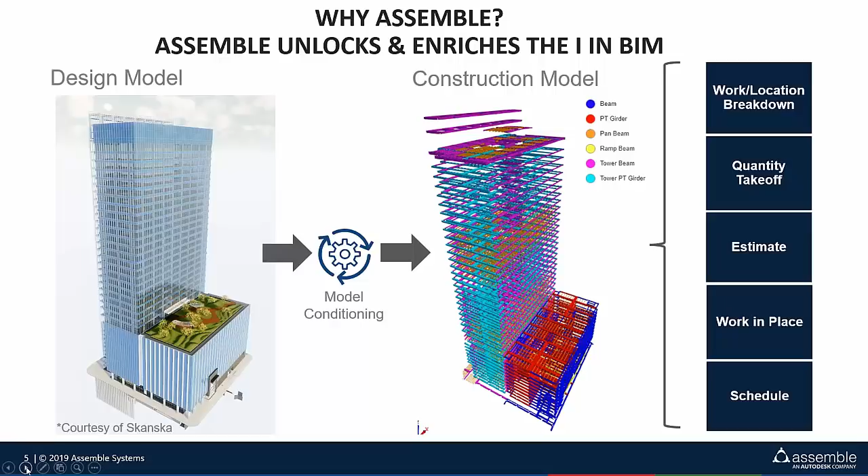So that's the summary. Why don't you go ahead and jump in and give a little overview of BIM 360? A big piece we want to start with is giving everyone an understanding of Autodesk's approach to the construction space, but more importantly, the project environment and how we're driving collaboration and communication across all of our different disciplines.

The backbone of our focus and our game plan is to introduce more predictable outcomes into the job site. And the best way that we can do that is by first digitizing all aspects of it. And that's not just as simple as adding features and functionalities.

We want those integrations between different products, but as communication occurs between different solutions, and also, most importantly, different people in the field, in the office, even working and collaborating with owners and designers as decisions are being made, we want all of that information to drive predictable insights into the projects.

Now, the challenge that we've always had is how do we pull all of this great data into one unified platform? And that's really been our focus. How do we pull these platforms together? And we've really taken an approach that's threefold.

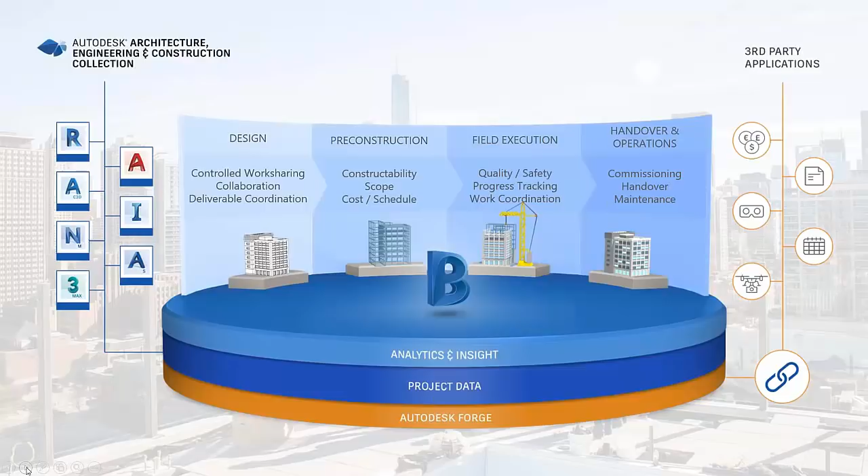And as we look at this next slide, what you're going to see is that we've layered everything on top of an open API platform called Forge. And Forge really serves as the backbone for all things BIM 360, and more importantly, the data structure here at Autodesk.

Now, when we look at how Forge operates and how it's structured, it provides access to third-party applications so that they can integrate directly into some of the solutions that you know and probably use on a regular basis, like Revit, Navisworks, and even AutoCAD and Civil 3D.

All of that information also compounds and collaborates with our BIM 360 modules, which we'll talk about in just a second. As all of these interactions are occurring between third-party applications, our own homegrown tools, and also the core products that make up a lot of our portfolio, we're gaining analytics and insights into how the teams are working on different projects.

We're also gaining insights into how information is being shared, what opportunities we have for improvement, and all of that's layered into each one of the different phases, whether it's design, pre-con, field execution, and obviously into owner operations.

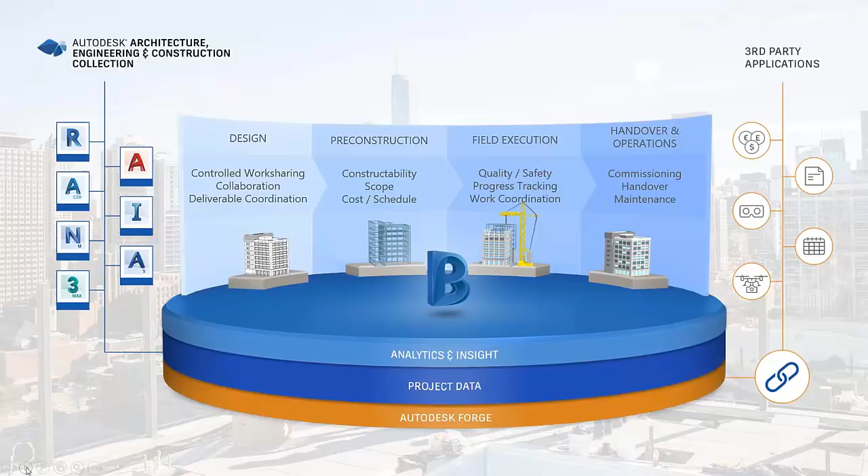Now, the backbone of this is our document management platform. And when we look at our document management tool, what we're looking at is a series of different applications and functionalities. This workflow comprises a lot of different features and functionalities.

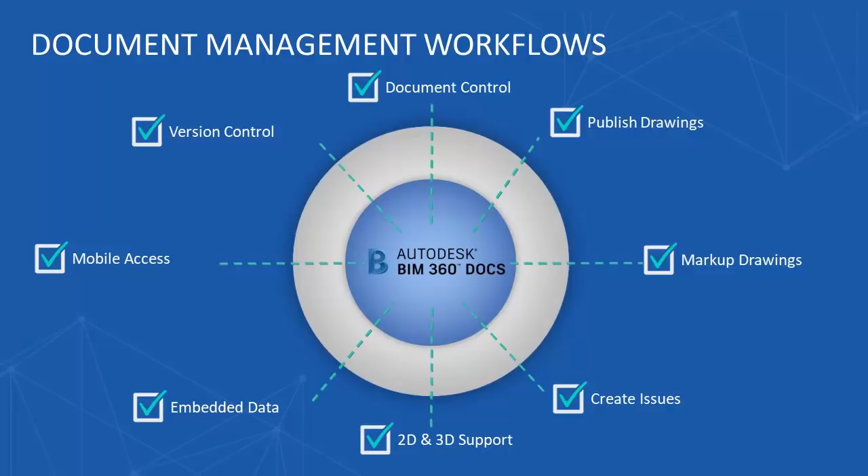For us, that includes everything from document control, publishing documentation, doing revisions and markups, and also looking at documents in both 2D and 3D views. This allows us to really deliver a complete connected solution to manage all of our 2D plans and 3D models in one cohesive location, one simplified location.

The next little piece that we're going to talk about is our design collaboration. So it is important, obviously, that we have a singular document management platform, but we also want to make sure it's easy for customers to get information from products like Revit and AutoCAD into a document viewer, a really simplified way of viewing this. So our design collaboration workflows take that just a step further.

Using our design collaboration tools, we can actually live link and real-time share documents directly from products like Revit to ensure that information is shared at the times that it's most important. To take that even a step further, we allow you to actually generate design packages.

This allows you to create documents and store them in a way that was purpose-built for the architects and engineers, while also giving general contractors access to progressions as those sets evolve, so that we're not just doing sheet comparison, we're doing set comparison and understanding where critical impacts on a project may affect long-term development.

This also allows us to do simplified change visualization and ensure that we understand the impact of design changes as they occur throughout a project.

We take that a hair further by actually evolving our workflows-based approach around coordination. On the next piece, you'll see that we have the ability to take the model that's been uploaded and, using our Glue platform, instantly run clash reports, do model navigation, and work with our trades.

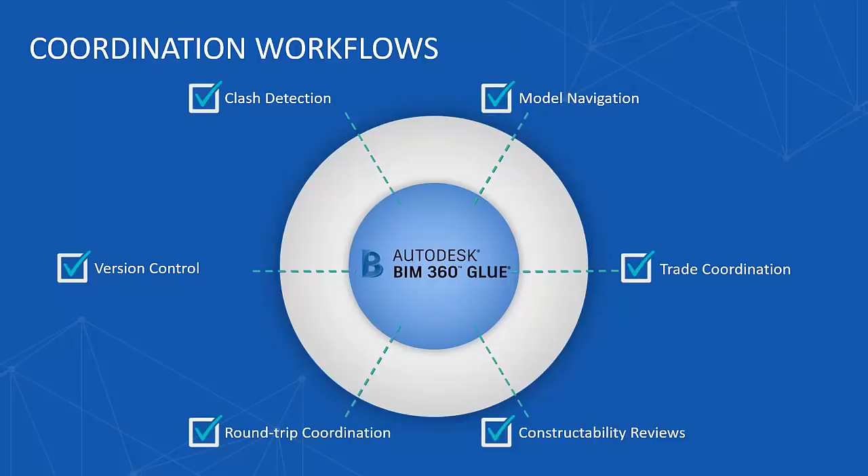Now, once all of this design communication, collaboration, and data has been evolved, we move into our project management workflows. This is really the opportunity to take all the great documentation and models that have been generated and make them actionable.

Inside this module, we have the ability to work through submittal workflows and develop RFI reports. We also can go through safety modules, quality control, and just recently released our new cost control modules, really allowing users to take advantage of every piece of data they've built throughout the process and deliver a cohesive model set.

Now I'm really excited to hand this off so you guys can see how Assemble plays a role in building out the totality of what Forge and BIM 360 are bringing to the construction space.

Great overview. So, as I said before, and given the context here, that title says Assemble and BIM 360 are better together. There were so many things as we were working independently that I could see our roadmap, including capability that Brandon just went through, all throughout BIM 360, and vice versa.

And I know in conversations that we were having that BIM 360 was looking at that object-centric approach, and how you can use the model to organize content that you're sharing across estimators, superintendents, schedulers, project managers, and have that as your common data environment, the host of information and how you organize, collaborate, and dive into that information.

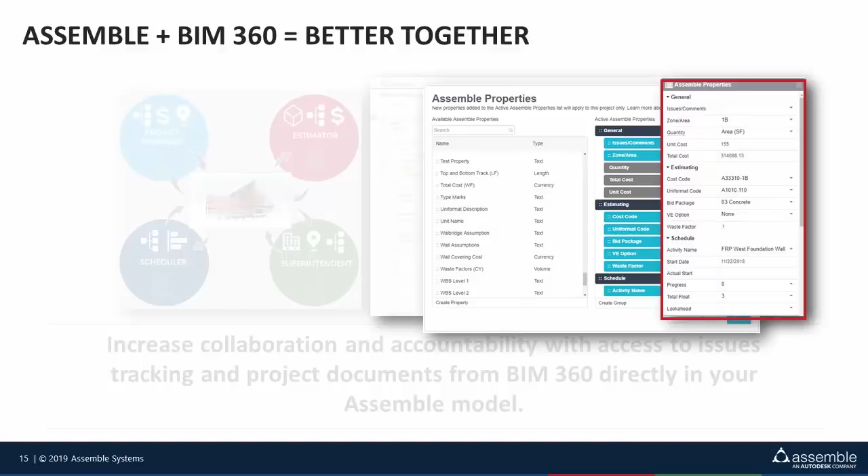You can organize these views, and they're dynamic. They're based on the information that's included or layered on top of. So as things change or are adjusted in those properties, your views are dynamically associated to that.

So I can create that view and give access to Brent, and he can see things as it's installed or as it's progressing through the classification and organization. So I just wanted to give a little more context on how we're organizing all of these workflows and data input around the model objects.

Brandon, anything to add on this? Yeah, Tim, I think to your earlier point about conditioning and then accessing the information, if you look at these roles, we're all pulling from the same data set. There's a lot of powerful data inside the building model and inside the data that's being created in BIM 360.

But me, as a unique role within the construction process, I've got different needs for different portions of that information. Assemble's really giving us, through the appending of additional data, the grouping, sorting, filtering functionality, and then creating those specific views that you just showed. It gives me the opportunity in any role to engage this information and manage the data from my unique perspective.

And that's the feedback we're getting from each one of these roles in our customer base today. It does cut through a lot of the wading through digitized and undigitized data, getting straight to what you need from a model.

Absolutely, we're about midway through, a little bit more than that. So let's go ahead and dive into the integration point.

I said it up front, but this is a phase one. We're going to have a lot of others coming down the pipe of how we're tying together the Assemble product with BIM 360.

That started with wanting to extend our information. So I talked about how we can add in data, and Brent just talked about what those workflows are. But we know that project files and documents are key to workflows in construction, and we want to use that object-centric approach to how we organize that content.

So in addition to the information I'm adding, I can layer in project files as well. Really what that is, is extending the data you're already working with to that file structure and giving it a unique, flexible organization, leveraging the I in BIM.

If you guys have heard us talk in previous webinars through Assemble, we want to enhance that I in BIM and ultimately give access to the team as they're diving into that content, as they're diving into particular components. They don't only see the metadata associated there, but they have access to project submittals, cut sheets, photos, anything you want to associate with that object. You're leveraging that organization structure.

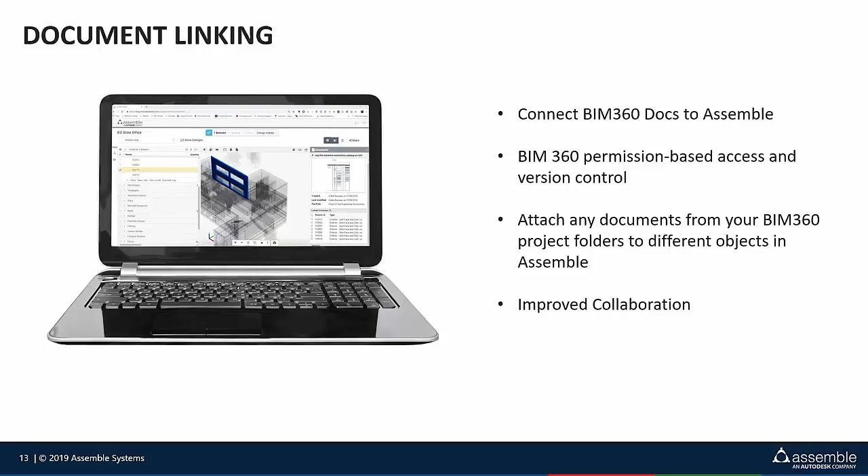that BIM 360 data as it's associated directly to the quantities that are impacted. That's been the biggest request from our users, just to understand how that link is happening and how the cost or schedule impact of those document updates rolls down to the quantities.

So within BIM 360, we have a common issues service that allows your team to aggregate issues across all of the various workflows Brandon talked about earlier. You're using one consolidated or federated system to manage that communication.

With Assemble, we've had this notion of wanting to incorporate communication in our product, to a point our users would take information out and share by email. That was really the collaboration that happened around Assemble previously, in terms of wanting to have a conversation with other team members and resolve something.

That said, with the issue service here, I can link directly to objects in the model. I can link directly to components in my 2D sheet and create snapshots. And I say snapshots, but those are live links back to that particular point, camera position, and sectioning, and whatever you have included in your view. We have that live back into that 2D or 3D view from that issues panel.

So now in our product, we have the ability to directly have a conversation, assign things, give a ball in court to a different team member, have them respond. So that workflow is around whether it be design review, value engineering, or quantity takeoff - any of those things you're navigating through and understanding the scope and digging through the model content. You can now raise flags on things and create those issues focused on collaboration across your team.

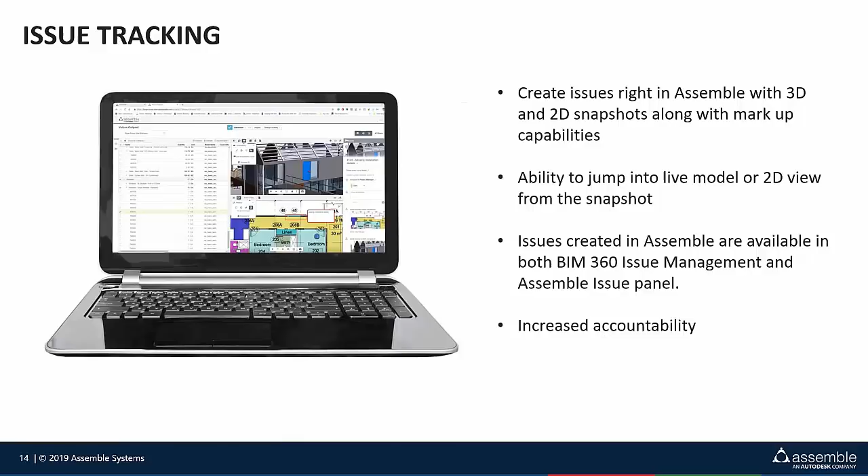That's fantastic. So that said, just a few more minutes to go, and I'm going to jump into a live demo. I'm going to start on the landing page in Assemble—these are some of the views I mentioned before.

The idea here to connect the two is that I can go in and link to a BIM 360 project, specifically pointing to which project I want to link. Now I've made a connection between an Assemble project and a BIM 360 project.

As I make that connection, let's jump into a view where I have a component selected. I can see in my model I've got a piece of drywall, a wall selected, and I want to associate a document to that. I now have on my left bar this project files panel, looking at my project files from BIM 360, and I can go through my repository and select the document.

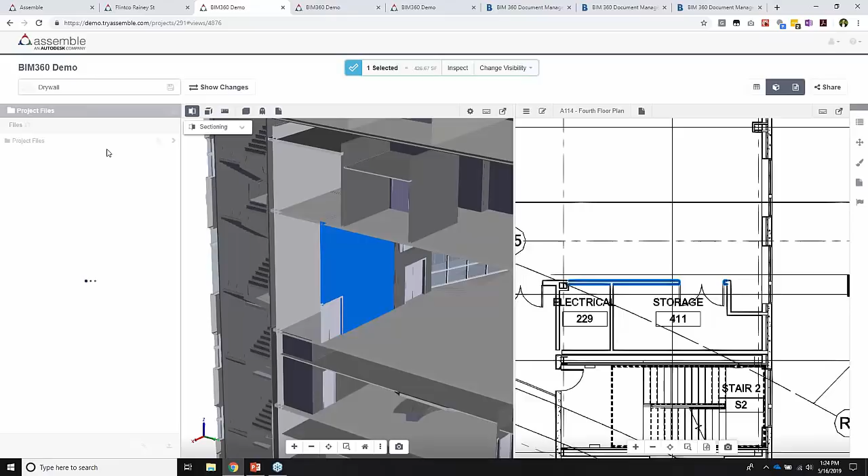In this case, I want to go into some specification information and make a connection to that. I select a particular document, and now I've got an object selected in the model, a document selected, and I'm going to create that link.

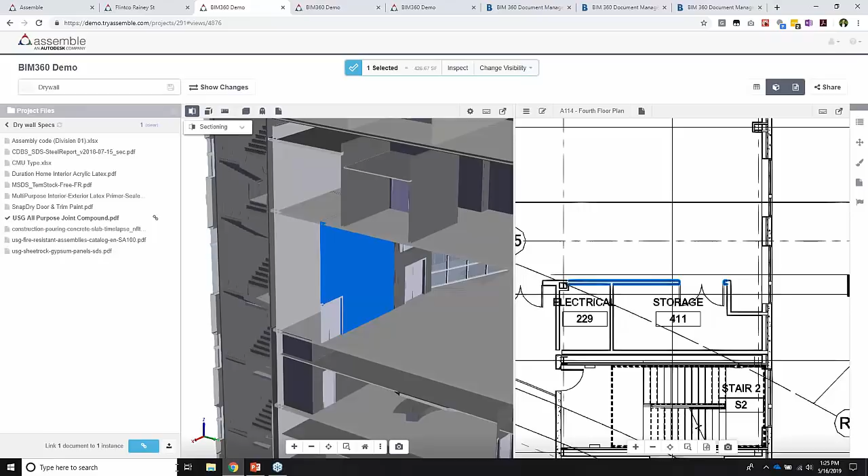You now have access on the right side to what documents are linked. On the left side it's broader—the file repository across your entire project. On the right side are the documents that are linked, and you can see the various components they're linked to. You can find those components in the model and view the various versions and download the document.

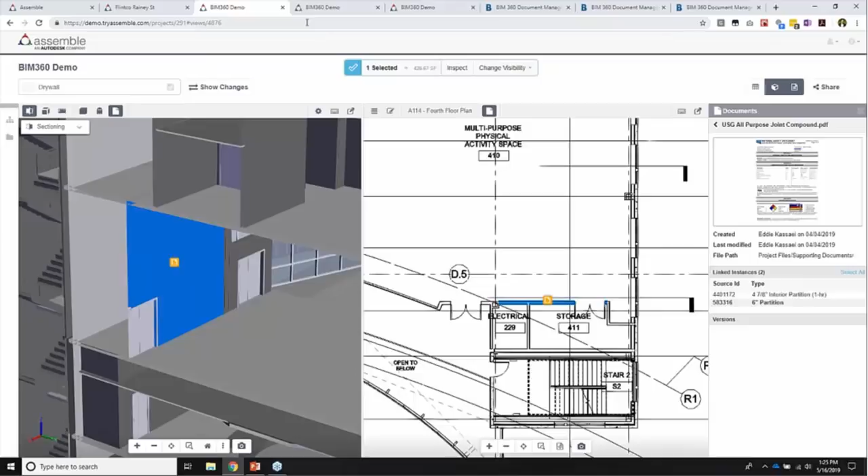Additionally, within the viewers, both 2D and 3D, you can choose to show the visual representation of document links directly within that panel. Here I've got a 3D view open and a 2D view looking at the same context.

I want to go ahead and create an issue on this. I'm going to open up my issues panel and add a new issue. I can see on my project I have a couple other issues, and I'm going to jump into those in just a second. I'm going to create a new issue.

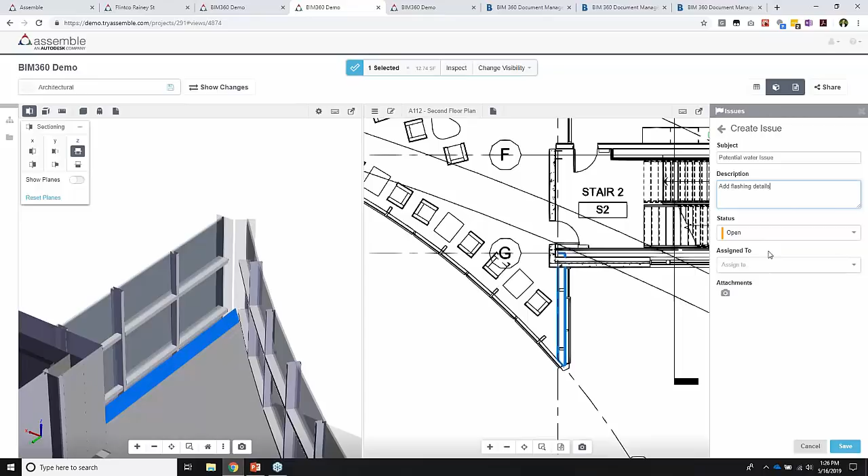I'll just call this potential water issue, give it a description, and assign it to someone. I'm going to go ahead and assign this to Eddie.

With this, I can actually make an attachment from either my 3D or my 2D component. Within these I can pin things or annotate, and in this case, in 2D, draw and add a text value, then attach that 2D snapshot.

You're going to see in both of these I have the selection created, and I'm going to save it. Now this is going to create an issue within that BIM 360 repository—that's project-wide, across all of the components through BIM 360.

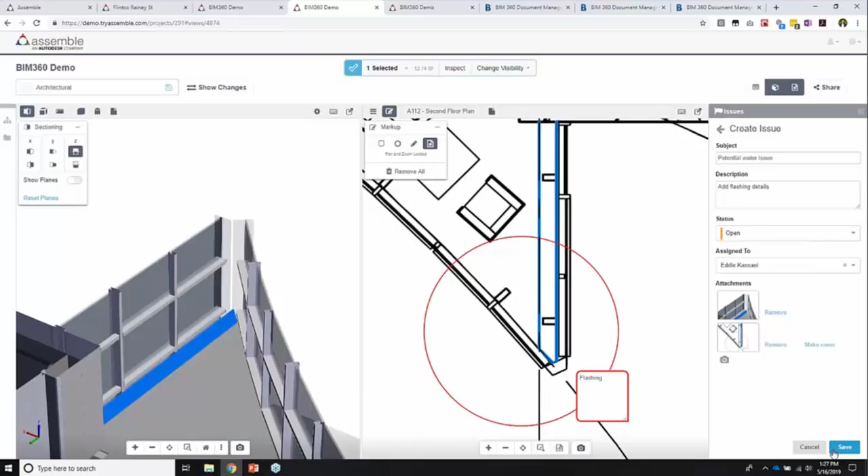Let's look at a different issue and quickly see how we would navigate to those components, both in 2D and 3D. Syed had created an issue previously. Now I'm going to review this—I can quickly select that information and it takes me right to what was created with the annotations, same in 3D.

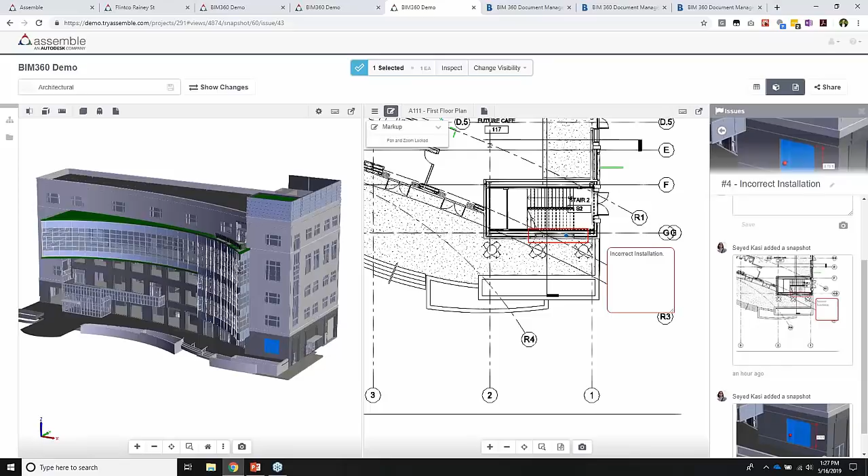Not only can I do this within the context of being in Assemble, but if someone has created an issue and it now shows up in BIM 360, I have not only the information as snapshots here, but I can live link from my BIM 360 repository of issues back into that model view in Assemble.

So in the same issue I've previously navigated from, I can jump straight into that issue, and it's going to take me right to that particular viewpoint that I've just selected.

The last point I want to make sure I point to, and I didn't do this at the start because I didn't want to log out and disconnect every tab I have open, but with this we now have single sign-on with Autodesk ID. As a user, you can either continue to use your Assemble credentials, and once you get into the project, log in with your BIM 360 credentials, or at the front end of integrating these two things, you have the option of using single sign-on with your Autodesk account.